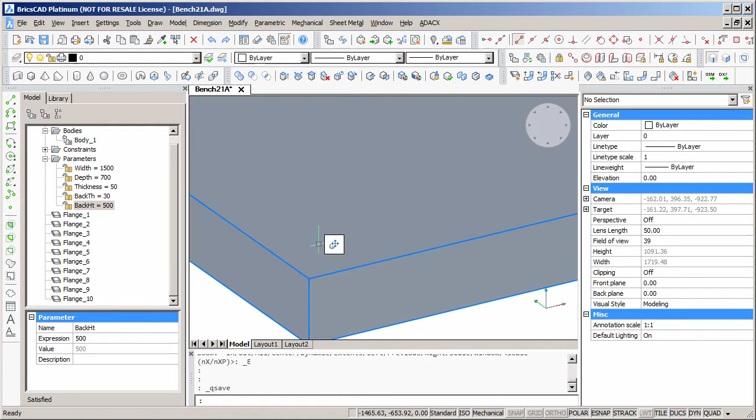detail it for unfolding. At the sharp corners where three flanges meet, we need to open up little holes to create enough space for the bend to be formed. This is called a bend relief or corner relief. The command SmReliefCreate can do this for the whole model or parts of the model. The size of the relief is based on the size of the bend radius.

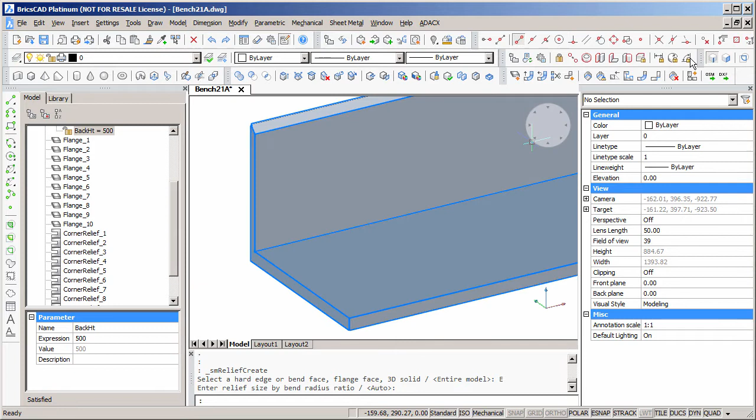Once the reliefs are created, we can use the Create Bend tool to convert sharp edges into bends. We can see how these bends terminate cleanly in the corner reliefs we created earlier.

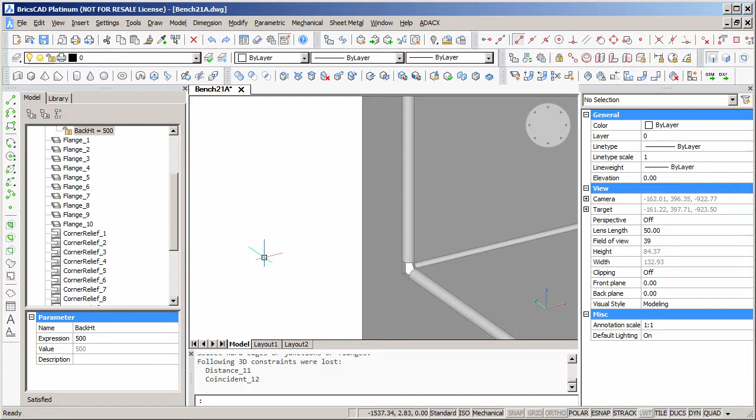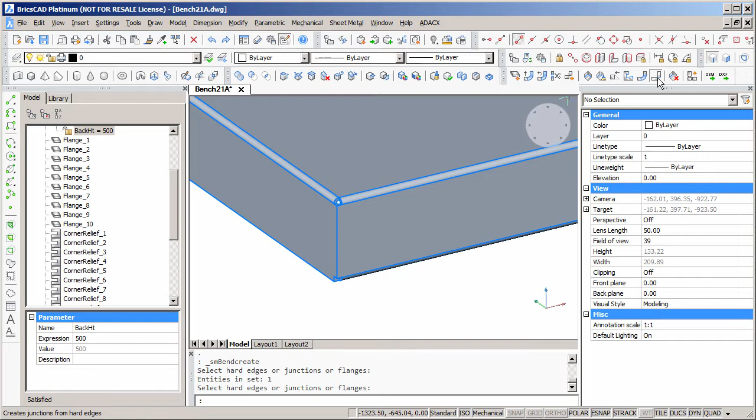Other sharp edges on the model will be turned into junctions between two flanges using the Create Junction tool. We have more of these junctions up at the top of the splashback and where the two splashbacks meet in the corner.

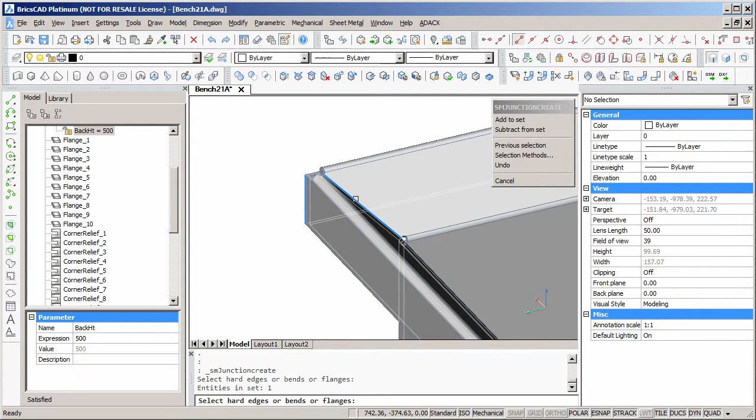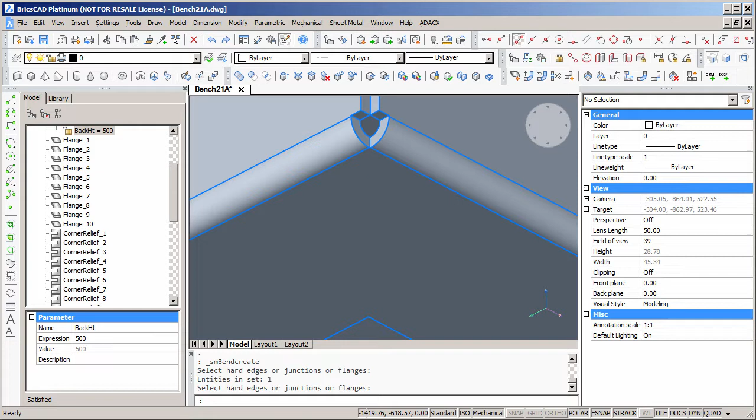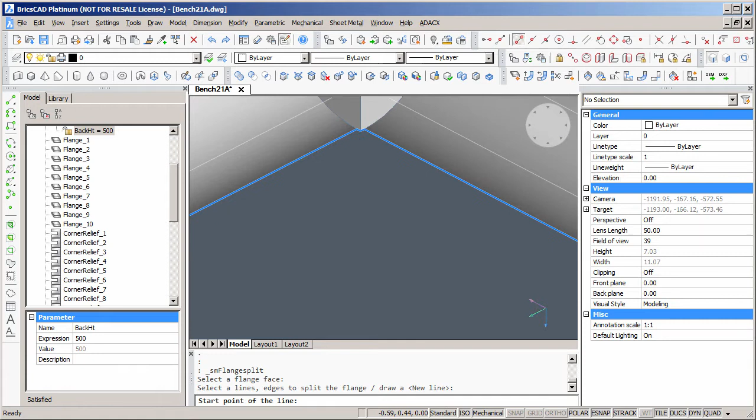We have another task to do. In its current form, the model cannot be unfolded. Some flanges are attached to two other flanges, and they need to be split so that they can be unfolded separately. So now we'll use the Flange Split command to draw a line across the flange and split it into two separate flanges. I'll snap to these corners to make a neat job.

The command offers us a choice. The line we drew can represent the left, right or centre of the split. I'll show you how to use that on the next split that we have to make. If we have a look in the mechanical browser, we can see that there are two flanges where previously we only had one.

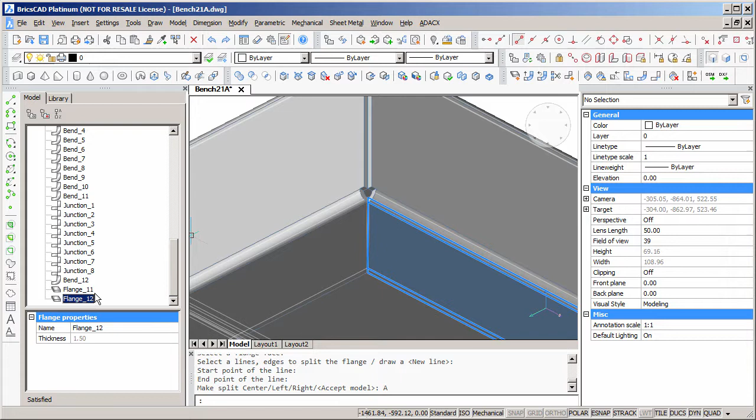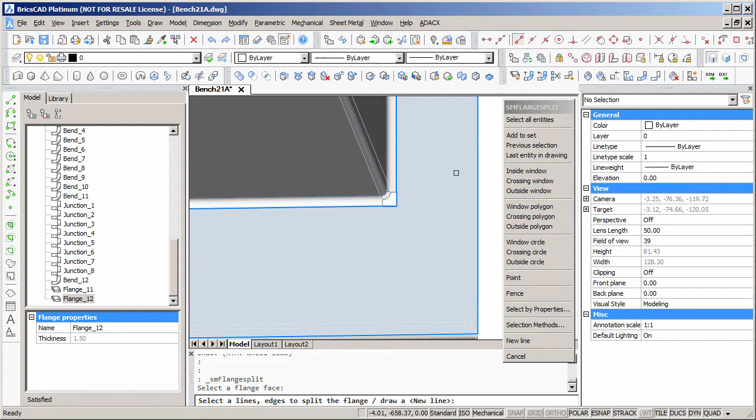In that first split, all we had to do was split the flange. But in this area we have to take out a piece of metal. We'll make two splits at 45 degrees up and 45 degrees down. I've set my polar snap angle to 45 degrees so it's easy to draw these lines. The first split, running up from the top corner of the corner relief, can be centered on the line that I draw, and it will cleanly fit into the relief.

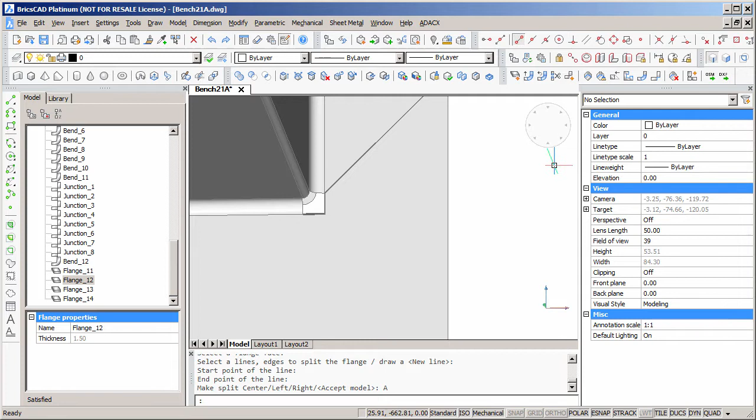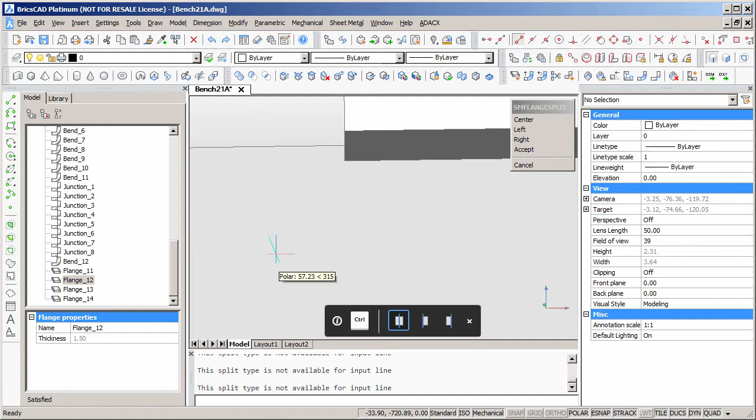But our second split line meets the corner relief on a tangent. We need to form the split on the inside, not centered on the line. By pressing the Control key, we can toggle between center, left and right solutions. You can see that BricsCAD can only form the solution that works.

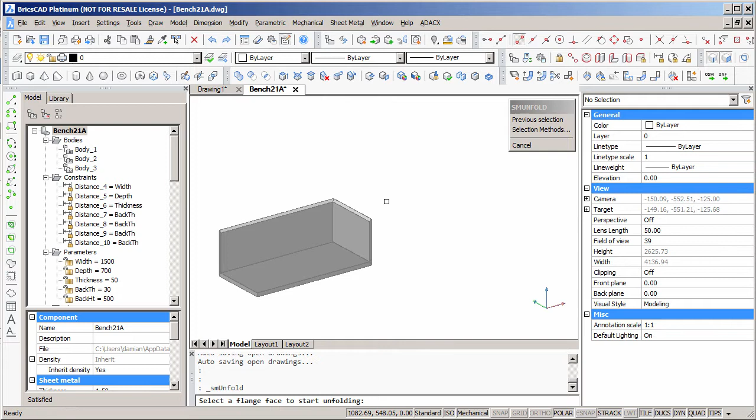So we have a little bit of movie magic here. I've created the two splits on the side flange as well, like so. So now I think we're ready to unfold the model into a flat pattern. The command is called unfold body, and it asks us to select a base flange, the flange that won't move, everything else will unfold around that. So we'll select the top of the bench top.

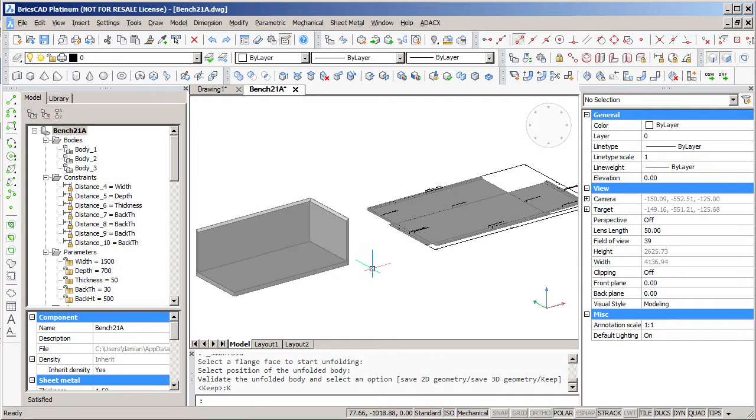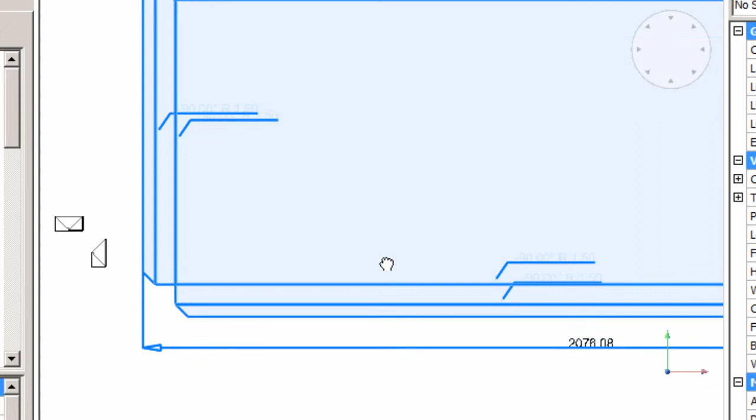After unfolding, we can save the flat pattern as a 2D drawing, as a 3D model, or we can keep it in the existing model. We can use the same unfold command to copy out the two little infill pieces and save them with the flat pattern. So now let's have a look at the 2D flat pattern. Have a look especially at the area where we split the flanges.

So that's the end of these movies about designing and creating a sheet metal kitchen workbench.